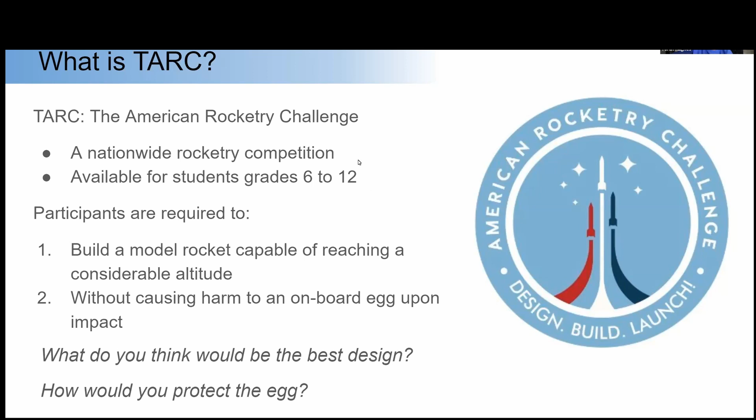The grand prize for winning TARC is a cash sum of $20,000 for the team and $1,000 for the school. That's for the first place national finalists. The cash prize gets lower the further you are from first place. There are also different categories within the competition. These categories also have their own cash prizes. These categories are rocketry, marketing, and presentation.

The rocketry category means exactly what you think it does: points for how well your rocket can achieve the envisioned objectives. Marketing points account for how well you're able to present your rocketry journey by video and throughout the media.

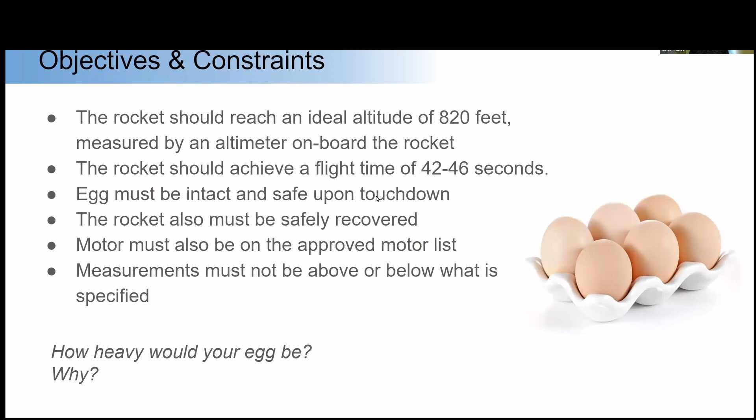Now that we've got all of that preamble out of the way, let's talk about some rocketry and its underlying principles. That way, if we reference a specific part of rocketry or our rocket in particular, everyone will know exactly what we're talking about. Rocketry is deeply rooted in physics. So, to give a basic understanding, we'll only talk about the leading principles. First, we'll discuss Newton's second law of motion, after which we'll talk about combustion and thrust, and finally about ISP, or specific impulse, and stability.

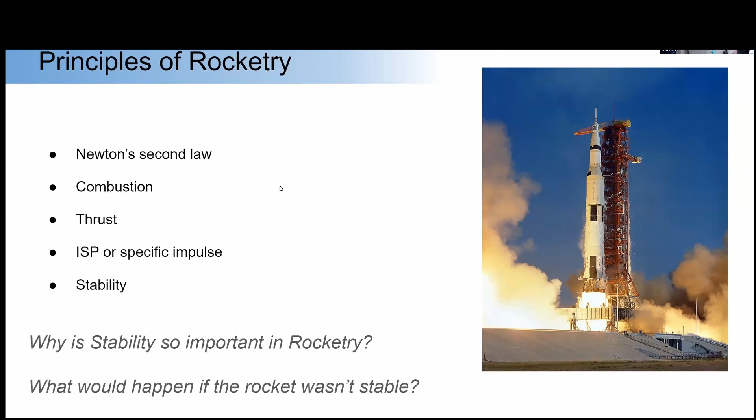Newton's second law. Probably the most important principle behind any type of rocketry, from tiny little model rockets to giant rockets that launch people and satellites into orbit. The basic point of Newton's second law is every action has an equal and opposite reaction. A good example of this is a rocket, as you can see right there. Thrust goes downward, the rocket goes up.

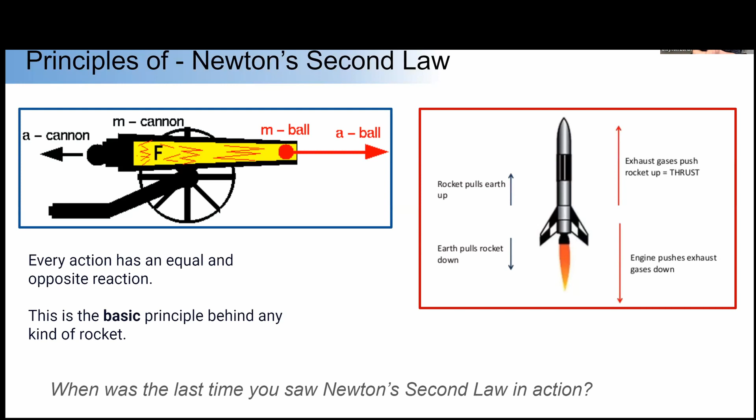Another good example is a cannon, which, when the cannonball is fired forward, the cannon recoils back. This is the most basic principle behind any rocketry, and it is probably the most important one to understand deeply. Because without this, thrust and combustion would literally do nothing.

Thanks, Clayton. So let's talk about what's generating this force: combustion and thrust, or to be more specific, combustion generating thrust. Scientifically, combustion is a high temperature exothermic reaction. These exothermic reactions, or explosions, expel hot gases, generating thrust, thanks to that Newton's second law we were talking about earlier. In a rocket, or in the case of a model rocket, a motor, the propellant is stored as reaction mass for forming high-speed jet fluid, usually high-temperature gas.

You have the fuel in a rocket, whether it's solid or liquid. This rocket is losing mass the more time that goes by. So it becomes easier for it to fly the more time that passes, essentially. So essentially, mass flow rate is just the amount of mass or gas or liquid that flows in a certain amount of time.

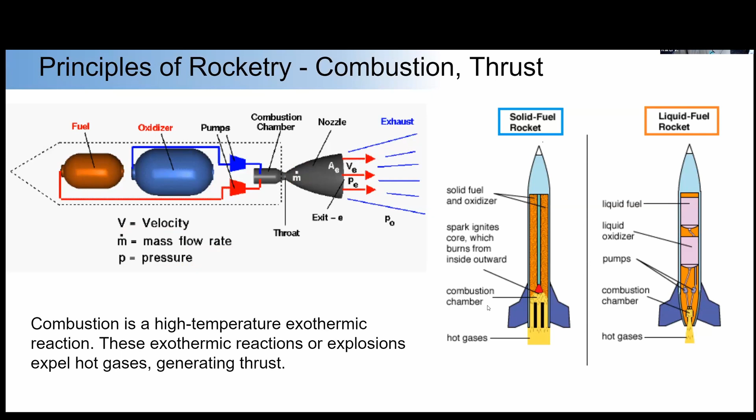Oh, sorry, I was muted.

So, the ISP, or specific impulse, is the measure of the efficiency of the reaction mass used to generate thrust in a rocket engine. A very general formula for ISP in seconds is thrust divided by gravity, or the Earth's gravity, so 9.8 meters a second squared, times mass flow rate. Mass flow rate is how much propellant mass flows through the engine at any time.

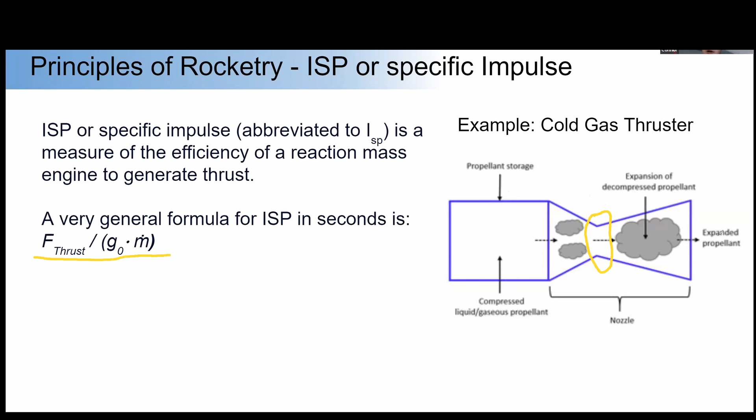Looking at our example of the cold gas thruster, we can see the stored propellant is expelled through the nozzle. The nozzle has area where it goes from a small opening through a large opening. The ratio between these is called the nozzle ratio. Generally, engines with a higher nozzle ratio are more efficient in a vacuum, as the propellant has more expansion and therefore more thrust. However, a lower nozzle ratio is generally more efficient in atmosphere because air pressure pushes in on the propellant and forces it into shock cones. So if the nozzle ratio is too high, it can damage the engine.

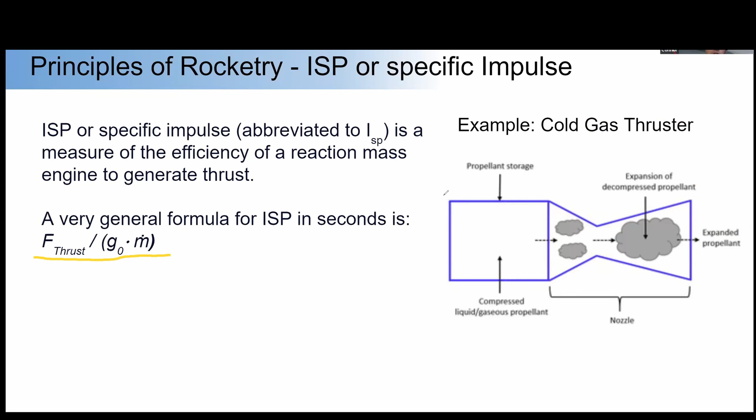Stability is imperative to ensure a nominal flight. Stability is also what facilitates a rocket to fly on a clean and predictable trajectory. An unstable rocket has the potential to whirl in the air uncontrollably. Stability is often measured in calibers. 1 caliber is equivalent to the rocket's maximum tube diameter. Ideally, the distance between the center of gravity and the center of pressure is 1 caliber.

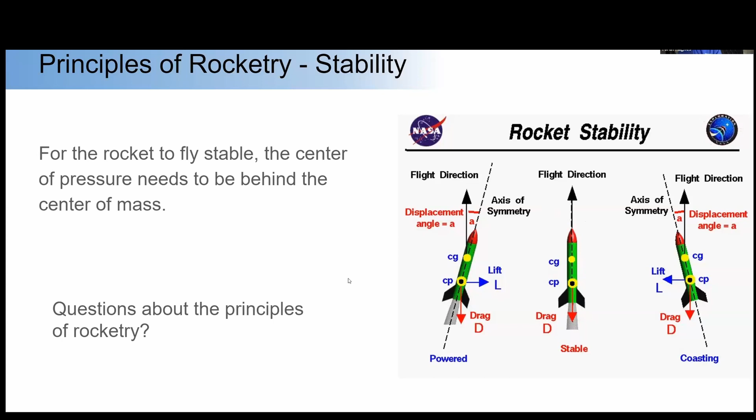Now we have parts of a rocket. Model rockets usually have at least 4 common parts: the engine, which actually expels the thrust; the nose cone, which goes on the top and aerodynamically redirects the forces; the parachute for safe recovery; and a body to house it all. Our rocket has much more than that.

To start off, we have that nose cone up here. That is where our altimeter is housed, which, as mentioned earlier, is how we get our altitude. It also redirects aerodynamic forces around the rocket. After that, we have our payload bay. It's this tube right here. That tube houses the egg and the egg protector, which is made out of foam.

After that, we have the transition piece. Due to the rules in the competition, we have to have 2 separate tubes at different lengths. So this is how we connect the 2. Inside of the transition piece, we have our nice little parachute. That doesn't really protect, but it gives a soft landing. It slows it down on the way back down.

Behind the parachute, there is dog barf or wadding, which protects the parachute from the heat when the engine back ignites. So after the motor is done firing, it back ignites to separate the rocket. So that protects the parachute from burning up.

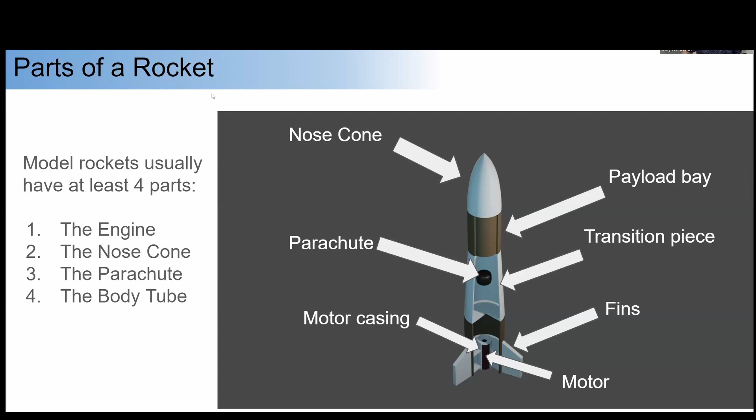Next, we'll move on to factors we used in designing a model rocket. We had to take several factors into account when designing a rocket. First, we needed to make sure that it was all compatible with the very complicated rules. I'm talking paragraphs worth of rules. Once we verified the dimensions of the rocket were appropriate, we moved on to checking other factors that were not mentioned in the requirements, but turned out to be very important: paint, and as mentioned before, stability.

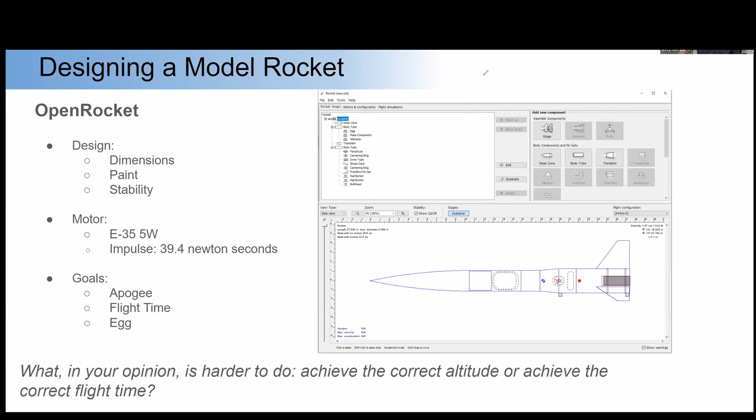Painting a rocket makes it heavier, yet it makes it smoother, so it makes it more aerodynamic. Because think about this, if you have a rough surface like this, the air is going to get caught in all of this. But if you have a nice flat one that's painted like this, there's less for the air to catch onto.

Stability is measured in calibers. The calibers range is 1 to 5. A recommended stability is around 2. Ours is a teeny bit less than 1.57. Next, Connor will now go on about the motors.

So for motors, we are going to use an E35-5W motor, which has an impulse of 39.4 Newton seconds for qualification flights tomorrow. We went through several motors, including the F44-4, but the E35-5W got us closest to our goal of 820 feet.

Next, when designing our rocket, we focused on the goals of the competition, namely launch a rocket to an apogee of 820 feet and bring the egg it is carrying down safely within 43 to 46 seconds. This has been the hardest part of the competition for us, and there were many unsuccessful attempts. However, we managed to get the egg down safely almost every time. So what do you think was harder for us, to achieve the correct altitude or achieve the correct flight time?

You can just shout it out, and you don't need to raise your hands, by the way. Actually, I have a poll for that if you want to let me. Oh, yeah. Okay, let's do that. Should launch now. And then just put your reasoning in there, or you can raise your hand and explain your reasoning. Exciting result. Sorry, 1 second. No one's answered yet. All right, we'll give you until 1 minute and 15 seconds. If you don't answer it by then, or if you want more time, just raise your hand, but we're going to end it after then. How about we just keep going and just leave the poll up? Okay, that's good. So do you want me to just say the answer?

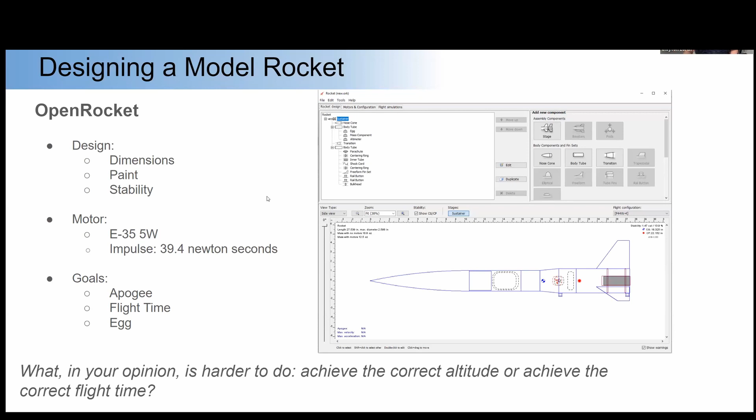Design process. Our usual design process looks like this. We would make a design in OpenRocket, run a simulation, make iterations, then we would usually run another simulation. So there's almost a tiny loop inside the loop in here. But once we deemed our design good enough, we would do a test launch. Then we would go back into making a new design. We did that around once or twice. We would keep a little bit, but we'd make a pretty big design change. Or if that design was good enough, we'd make an iteration, run simulations, and we just kept doing that over and over again until we got a rocket that we deemed good.

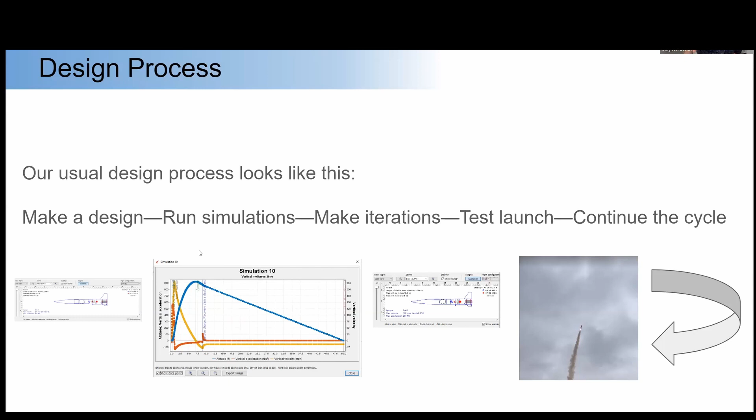As you can see, here are several of the prototypes that we designed in OpenRocket. The image at the bottom is our final design, which we built. On its first launch, it flew successfully; however, on the second launch, it exploded on the pad. The engine was broken, and we managed to repair it. However, we did not repair it well enough, and on the very next launch attempt, it burnt to the ground on the pad. This is why we decided to name our first rocket Burning Bill.

All right, next slide.

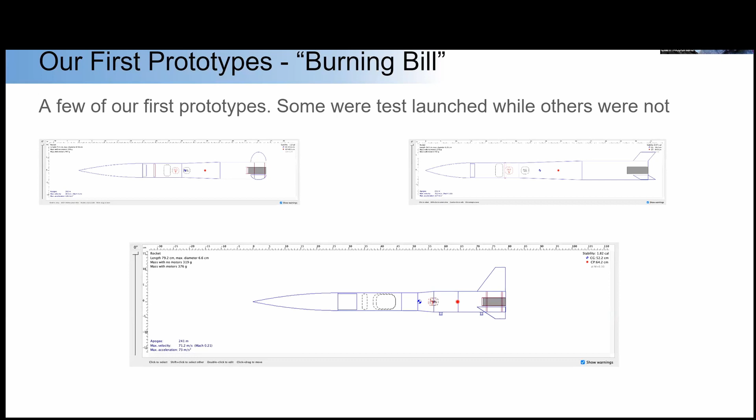So several of our launches were not successful, but that gave us stuff to learn from. We used a bunch of data like altitude, flight time, and the weight of our rocket, and we took that all into account and learned from launches and made changes to our design. We changed things like motors and adding mass to the rocket in OpenRocket, and we also tested different fin sizes and configurations. We ran simulations of the new designs in OpenRocket and then chose the best designs. We built those and tested them in the real world.

Here you see a screenshot from our data collection spreadsheet, which we'll discuss more later, showing some of the data collected from the launches, and then we use that and refine it into our new designs.

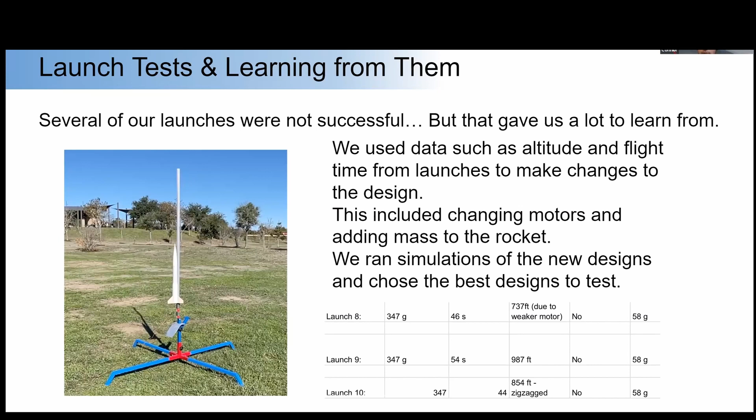Oh, yes. So, our current design. Using OpenRocket, we've run countless simulations and created several different designs. Every rocket is built differently, and every launch allows us to correct our design and to get us closer to our altitude and flight time goals. We adjusted the simulations for the wind speed, altitude above sea level, atmospheric pressure, and temperature, among other things, all according to the conditions just before launch. That's so we could get the most accurate results possible.

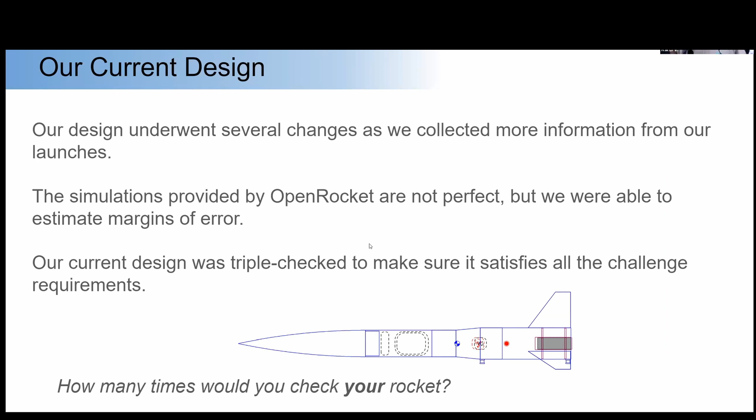However, OpenRocket is not perfect, so we carefully analyzed each launch's results and estimated the margins of error. Then we could adjust our design accordingly. We triple-checked our current design, including the motor used, to make sure it satisfies all the requirements of the competition. The last thing anyone wants in TARC is to get disqualified because their rocket is half an inch too short. We learn something new from every launch, which is why 15 plus launches are usually done before qualification flights. That's imperative to this process.

We've done just over 10, which is cutting it a bit short, and our most recent launch happened just last week. This was our last attempt before qualification flights, which are happening today. So a lot is riding on it. Fortunately, we saw an outstanding performance from our rocket using the E35-5 motor. That's the motor we're going to use again in qualification flights, which are today, wish us luck.

A score under 30 is usually needed to be one of the 100 teams to get into the finals, and we achieved that last launch. We have a good chance. Besides, even if we don't win the finals this year, we can always try again next year.

Silas, take it away. Thanks, Kalel.

One of the largest contributors to our success is our extensive data. As you know, our team is spread across the US, which means we're unique in the fact that we're a solely virtual team. This means that only a few of us were able to see the launch live, and even fewer were able to build the rocket. Of course, we recorded the main factors, such as egg weight, rocket version, the time, and altitude. But early on, our team decided that it was paramount to record additional data.

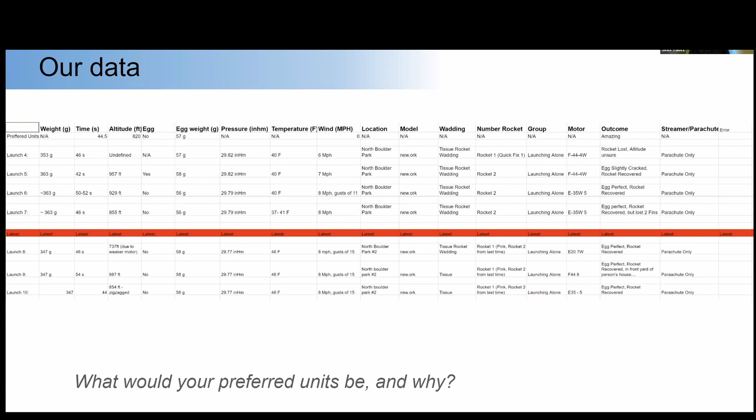And then for the marketing component of the competition, we mainly use DaVinci to edit and produce our videos, as well as Blender to make animations for said videos. And we use DaVinci videos for our Instagram, YouTube, and some short form vertical videos.